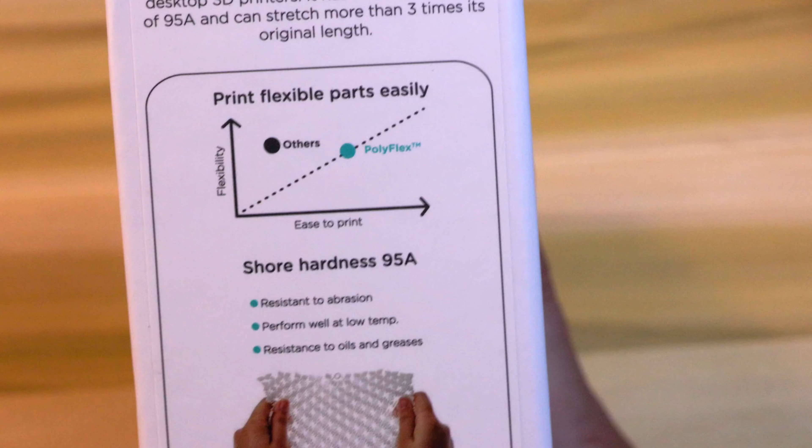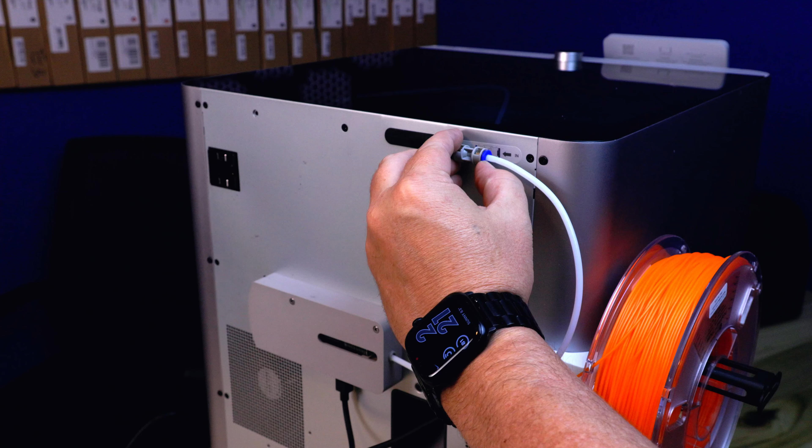So let's go ahead and get it loaded. So the first thing that we'll need to do is remove this, and all you need to do is squeeze on that little blue piece and then pull the tube out just like so.

We'll move that out of the way. Then you're going to take your TPU filament, and then we're going to feed it all the way until it reaches the hot end. So let's go ahead and do that. And this is a little finicky because it's not as solid as other filaments, so you really have to kind of line it up in that hole right there. But as you can see, it's pretty easy from there.

And I can actually see it in the tube through the glass and everything. All right, so it is in there as far as I can push it. So now let's go to the front screen.

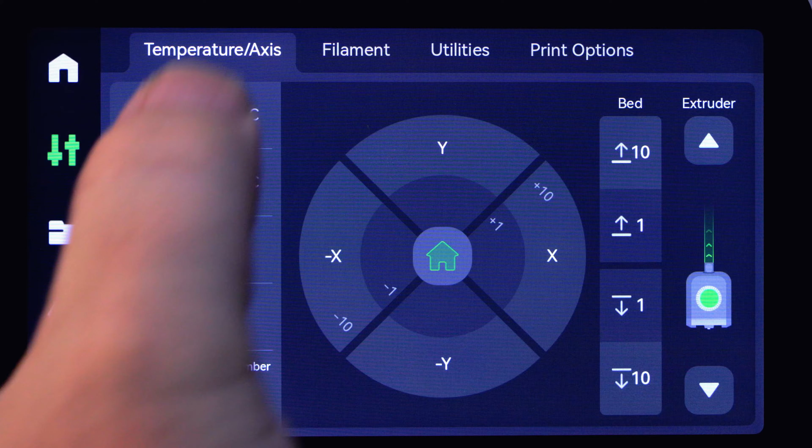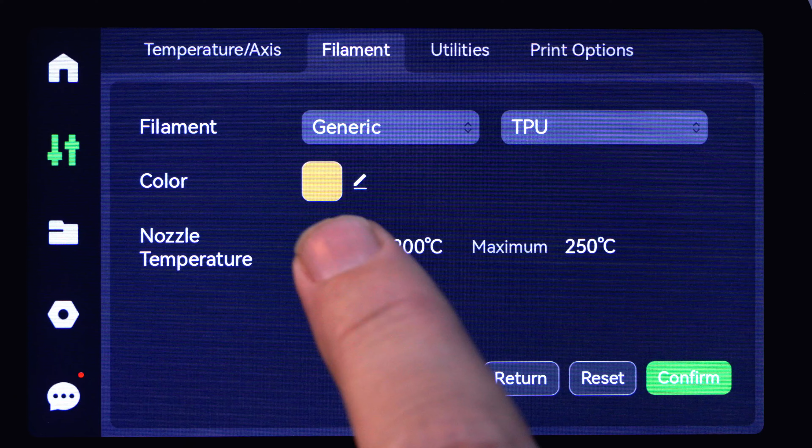All right, so now let's load the filament. So we'll want to go to our settings tab and over to our filament tab. And since I unplugged the AMS, it's in this mode now with the spool on the side, as you can see. I've already changed this to generic TPU, and I changed the color, and then I hit confirm, and now we'll need to load it.

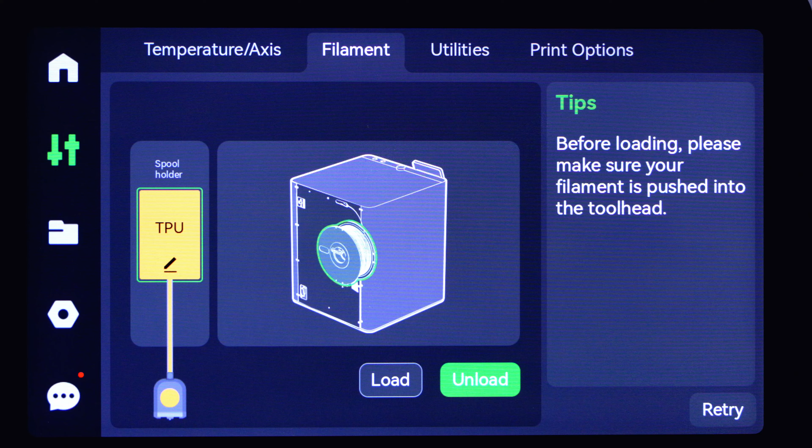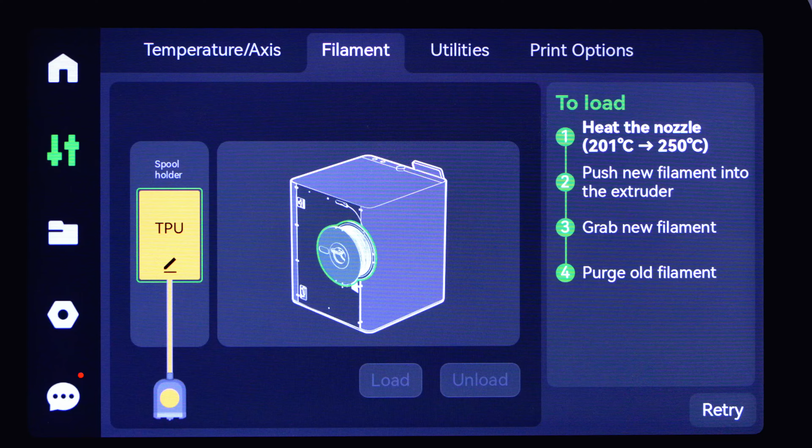All right, and all we're going to do is load this, and it's going to squirt some through, and we'll need to look in there to make sure that it has purged it out. So we'll go ahead and do that. And I'll fast forward through this part. And now our filament is loaded.

All right, so here we are in Orca Slicer. So you'll see that it's still showing my AMS, and if I hit the sync button, it says no AMS filaments. But if I go over to the device page, you'll see that the TPU is loaded. I believe what we need to do here is just concentrate on the first filament right here, and this will be the one that it'll print from.

So the first thing that we want to do is go ahead and select the generic TPU, and we're going to go ahead and let it print at this, generic, just whatever the default settings are here. So we'll go ahead and print a Benchy, and then we'll go ahead and start calibrating, and then we'll print a Benchy after that. So let me go ahead and get a Benchy loaded up, and we'll go ahead and do that.

All right, so I got the Benchy loaded in here, but we'll see it's showing up as black. I forgot to change the color, but let's go ahead and just save our profile. We won't change any of the settings other than the color. But let's go ahead and change this to orange, hit OK, and then we'll hit the save button here.

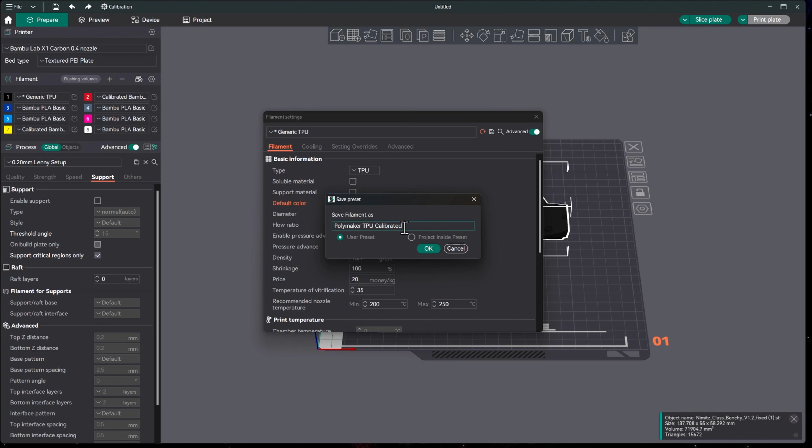And what we'll call this is Polymaker TPU calibrated. Even though we don't have it calibrated just yet, we'll go ahead and make this the name. Okay, so go ahead and exit out of there.

Not sure why it didn't change the color, but we can change that color there. So now it's showing up orange.

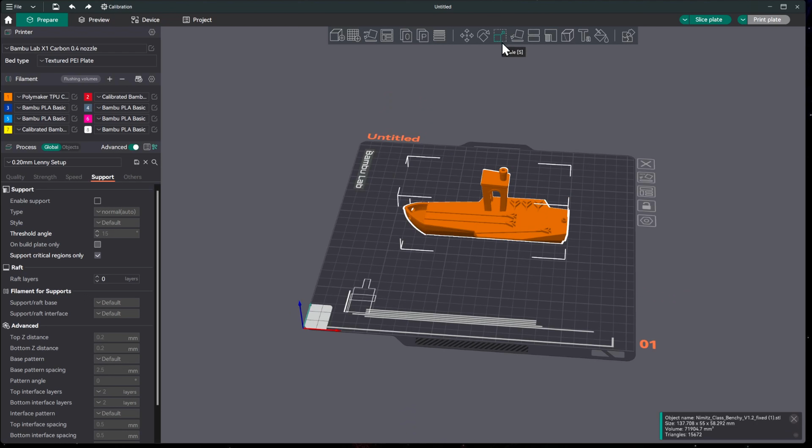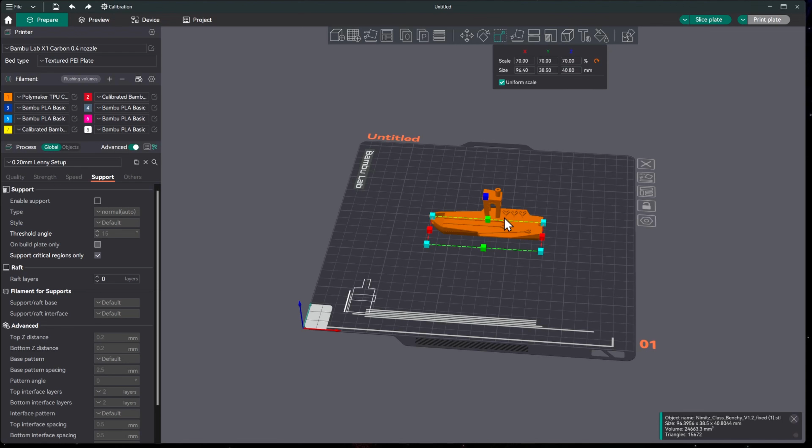Instead of printing this giant Benchy and taking quite a long time, we'll scale this down. Some of you have asked how to scale things - it's just this little button up here. As long as you keep uniform scale, no matter which of these three you change, it changes uniformly - same with size, it changes proportionally. Let's do this at 70%, and as you can see, 70, 70, 70, with the size proportional to that. Let's print it a bit smaller so we're not using up so much filament and it doesn't take so much time.

So we'll go ahead and slice the plate, and it looks like it's going to take just over an hour to print the Benchy. We'll go ahead and print the plate, hit flow calibration, and hit send, and I'll see you when it gets done.

All right, so let's take a look at the Benchy and see how it turned out.

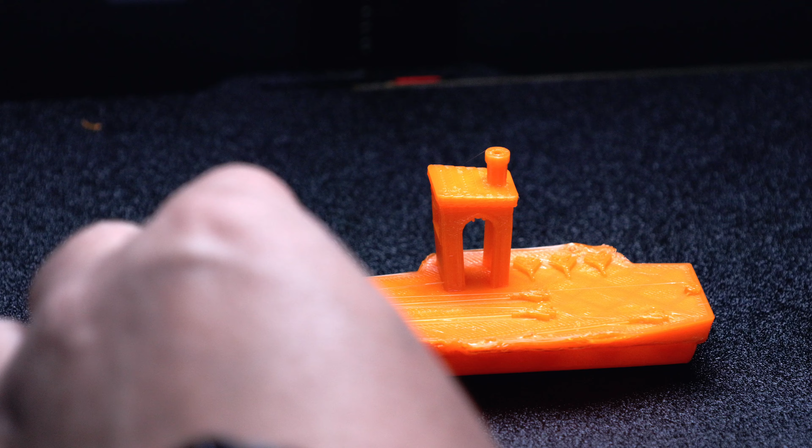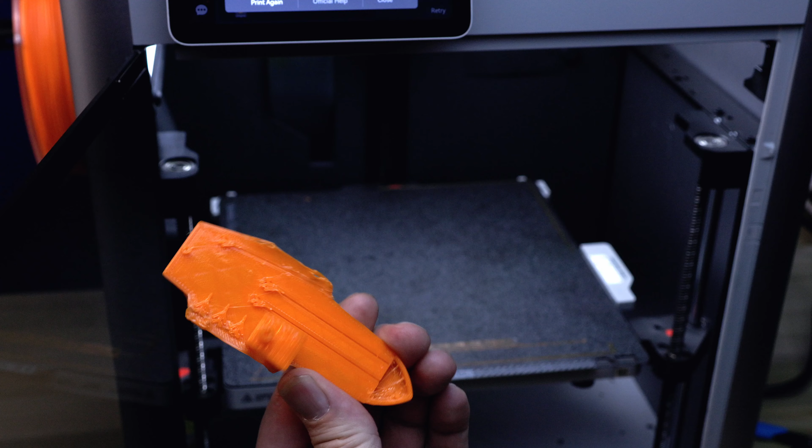As you can see, lots of errors on here. I don't know if this Benchy is the right thing to print with TPU, but we're going to give it a shot. We'll calibrate everything and see if we can get any of that out. But it is kind of cool that it's a flexible Benchy - this should be fun.

Now that we've done the Benchy, let's get started on calibration. The first thing I like to do is hit new project - don't want to change anything there, make sure everything's still here. We'll go in and enable pressure advance, then hit save.

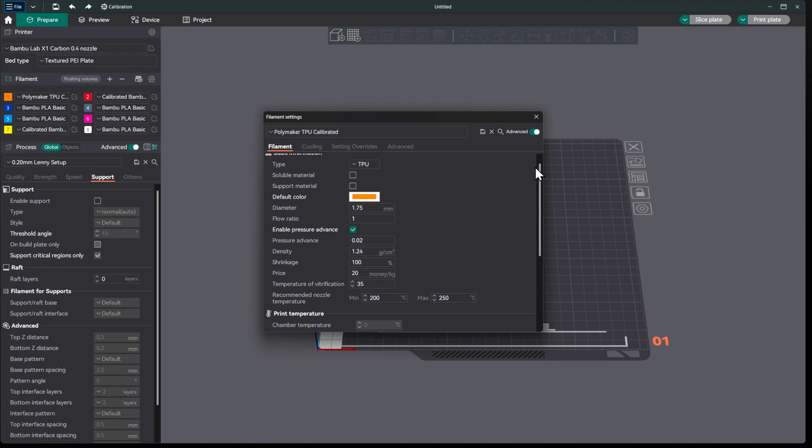Back out of that. The first thing we're going to do is the first pass of the flow rate test, and on this one it's an hour and 11 minutes. If we remember from the other one, we shouldn't really expect to see anything past the -5 and 5, like the 20, the 15 - maybe the 10 we would need.

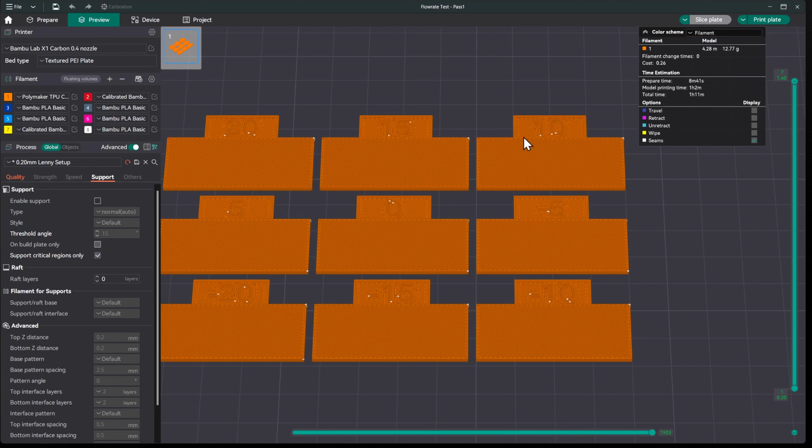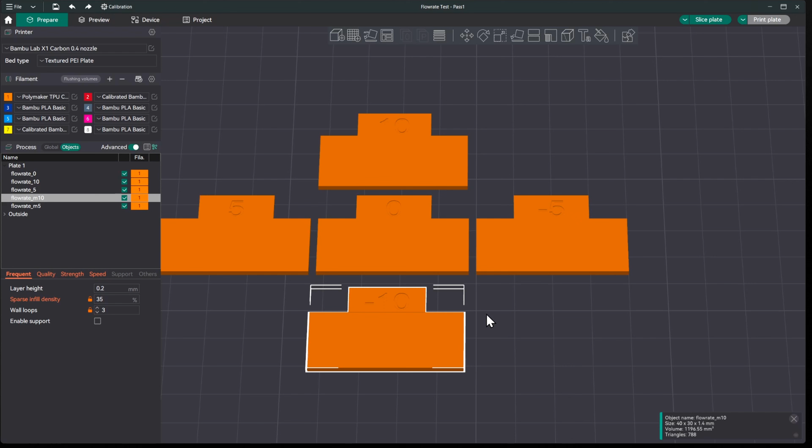So let's go back and prepare, and we can actually take that stuff out. All I did is click on the 20, and hit delete. I can click on the 15, hit delete, -15, -20. So really the only ones we need are up to 10, and the only reason I'm doing 10 on this one is because it had some pretty bad errors, so maybe it's off by a lot. Let's go ahead and do that.

That saved us a good 15, 20 minutes. I'll go ahead and print this out, and I'll see you when it gets done - no flow calibration when we print.

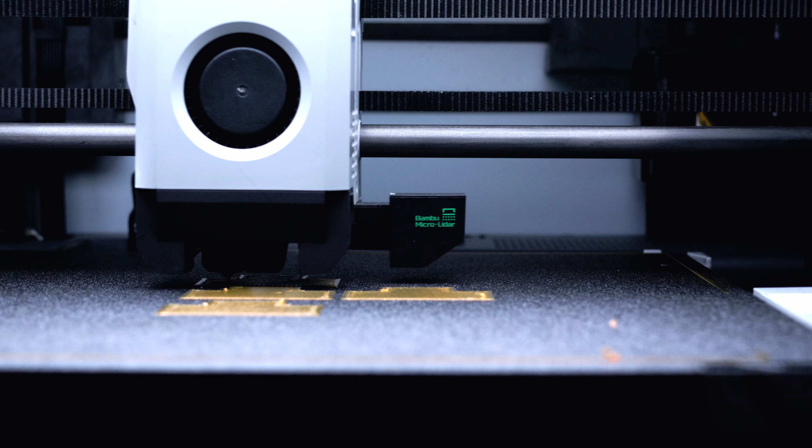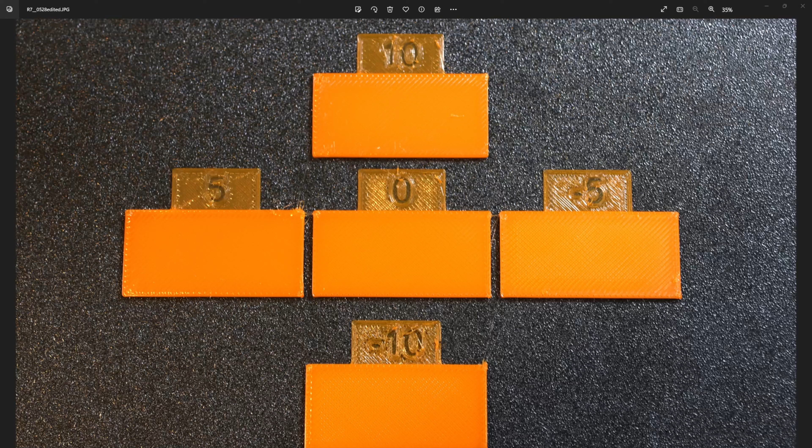All right, so let's take our picture test. Somebody had mentioned to put the light to the side and let it kind of rake across, and I think that did help somewhat with these. But like I said before, the 10 and -10 are really, really off.

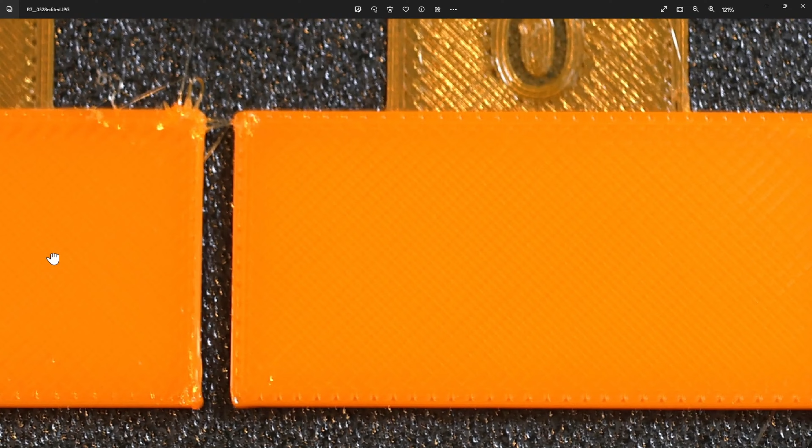If we look at this center one, this is 0, -5, +5. I would say the 5 looks better. If you remember, the next test we're going to do is just going to be in a range of 5 - it's not going to be in a range of 20 to -20 like this one was. So always err to the upper number so the next test will fine tune it back down. So between these two, the 5 looks like the smoothest.

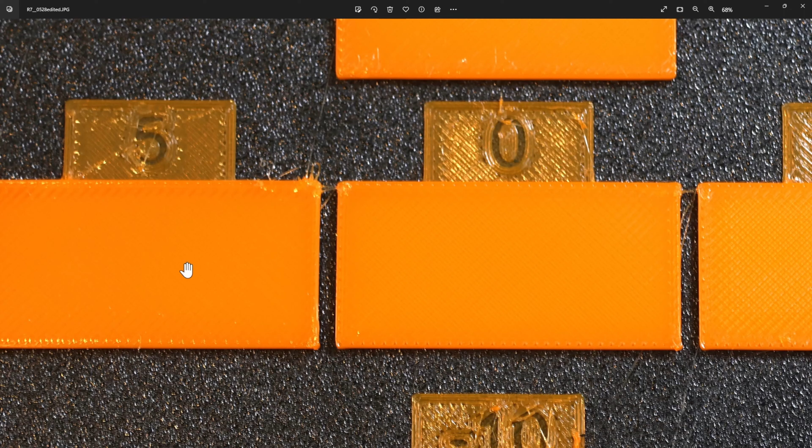So let's go to the wiki and run 5 through the little formula. Here's the guide for the flow rate, and we just need to go to this formula. Lucky thing here is 5 is the one that's in here, so we really don't need to do the math, but this is the formula you need to use, where this +5 is the modifier, or what you thought was the smoothest one. We'll use the old flow ratio of 0.98, which I believe is the one that's in here. We'll take a look in a minute, but we should be at 1.029.

So let's go to Orca Slicer and make sure that our old flow rate was 0.98, and we'll go ahead and update our filament. All right, so here we are back in Orca Slicer.

So let's go into here and see what our old flow ratio was. Our old flow ratio in the TPU is actually at 1, so we do need to do the math again. Basically 1 times whatever this is going to be - 105 times 1 is 105, divided by 100 is 1.05.

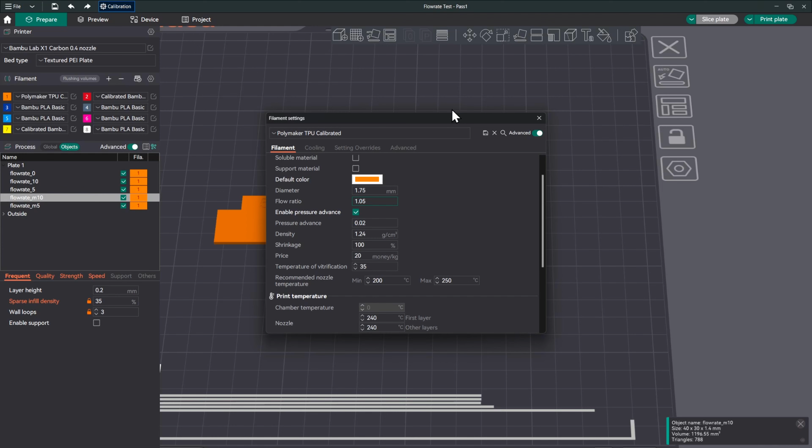So that's what we'll put in, and we'll run the second test. 1.05, and we'll go ahead and save that. We'll back out of there and delete everything off of here. Actually, I always like to do a new project in between these, and not do the calibration and then go try to print something. Always do new project afterwards.

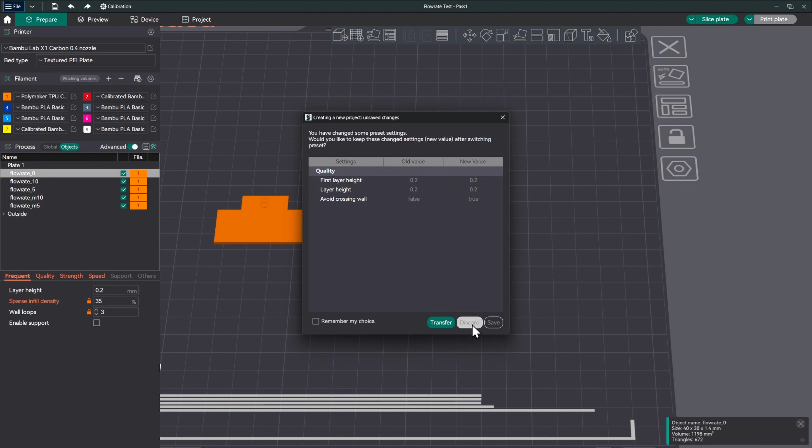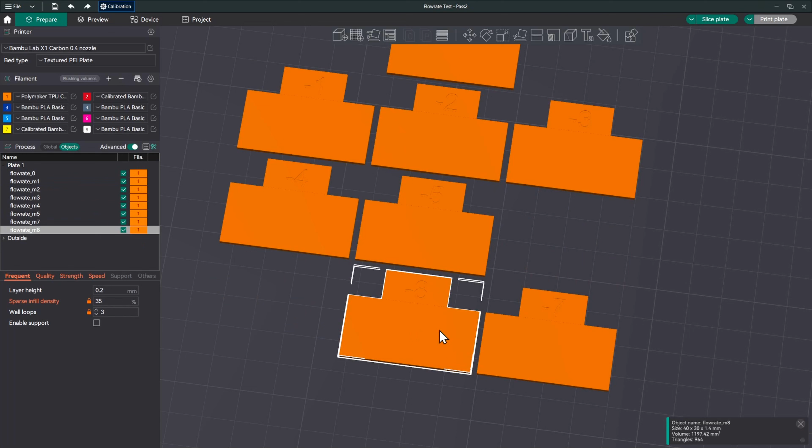All right, so now let's go back to calibration and let's run the second pass. Same thing on this one - I'm not expecting it to be more than 5 out. So we'll go to 6 and delete 9, 8, and 7. I don't think we'll need to do more than these 5 right here. We'll go ahead and slice that, and it looks like it's going to take about 45 minutes. So we'll go ahead and print the plate. No flow calibration, and we don't need to do time lapse either. I'll see you when this gets done.

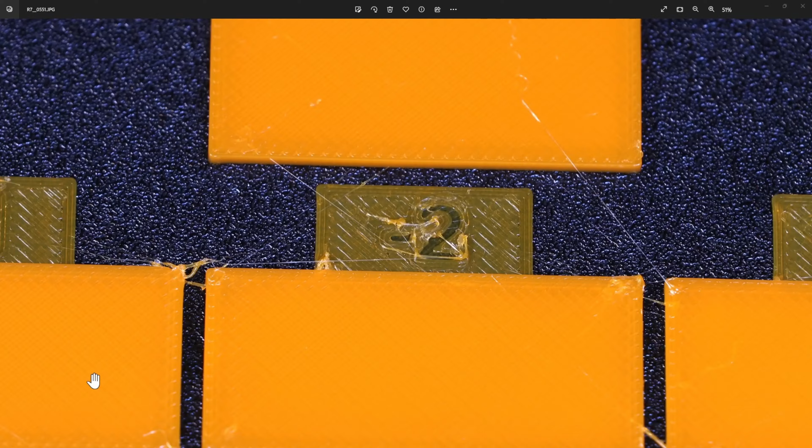All right, so we're done printing it here, and we took a picture again. The 4 and the 5 are kind of fuzzy here, they're not relevant. Really, I think it's between this 2 and the 0 when you look into them pretty close. That one seems to be rougher than this one, and then same thing on this one here. So I really think the -2 looks better.

So we'll plug that into the formula and then update the settings in the slicer. Our new modifier is -2, so 100 minus 2 is 98. 98 times our old flow rate, which was 1.05, equals divided by 100 equals 1.029. Wow, how cool is that? So that's the number that we'll update in the slicer.

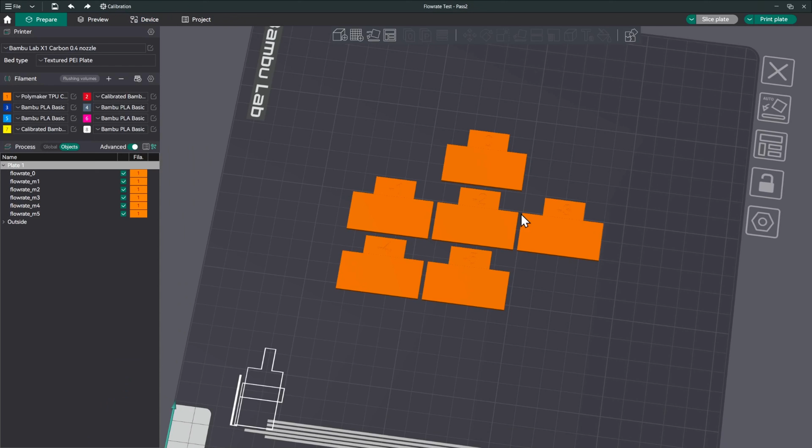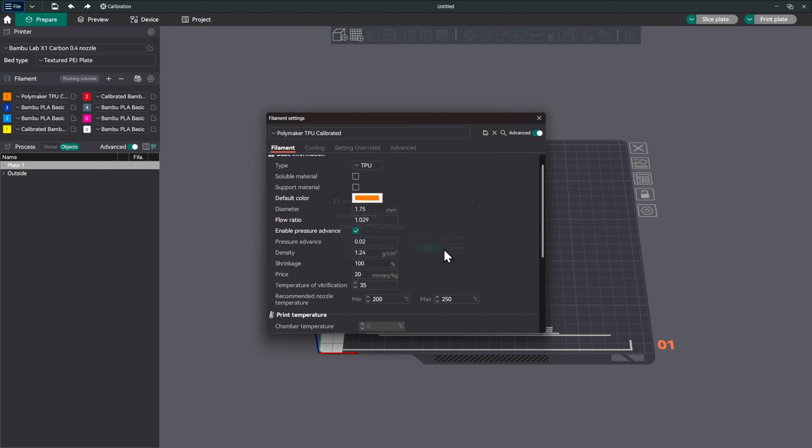All right, so here we are in the slicer. Once again, we'll hit new project, discard everything. Then we'll go into here, and 1.029 was what we came up with. So once that's done, we'll just go ahead and hit save, hit O. We want to make sure and hit OK. And then on to the next test.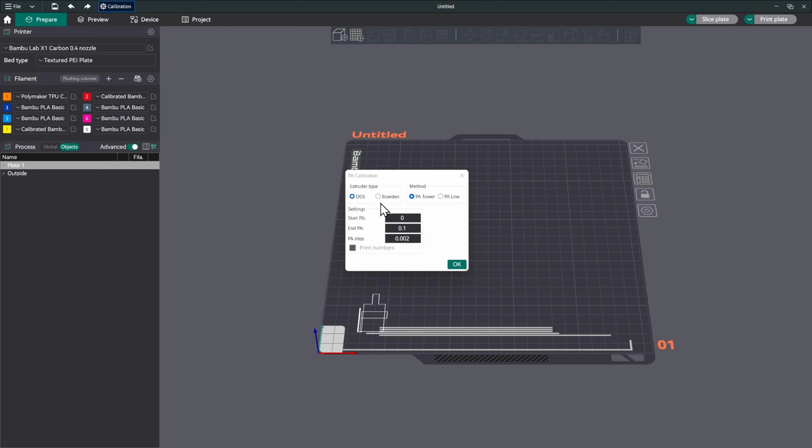So the next calibration test that we will do will be the pressure advance. We're going to do the tower method. We'll want to make sure it's direct drive, and we want to do the tower, and we'll go ahead and hit OK. That's going to put this up there, and we'll go ahead and slice it, and I'll see you when it gets done printing.

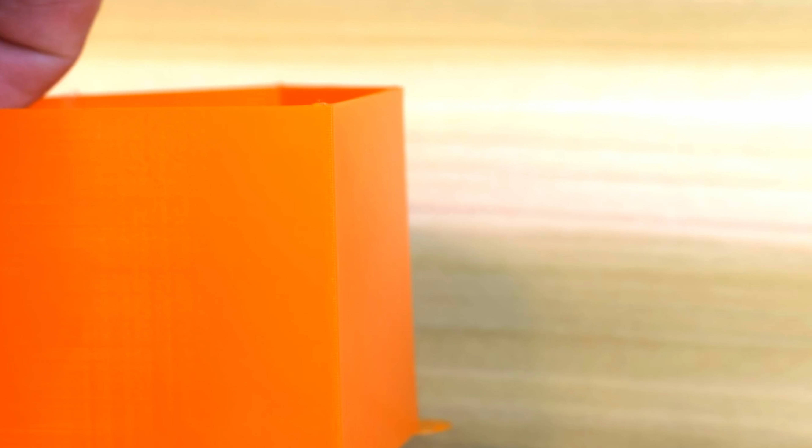All right, so for the pressure advance test, you're supposed to print this out and then measure how many millimeters it is until it starts to look bad like it is here, which I say is at 8 millimeters. So they needed to change the pressure advance to 0.016. For mine, you can't really see in the picture here, but it's perfect all the way up and down. So I'm going to leave it at its default, and the default for the pressure advance was 0.02. So we'll leave that alone and move on to the next test.

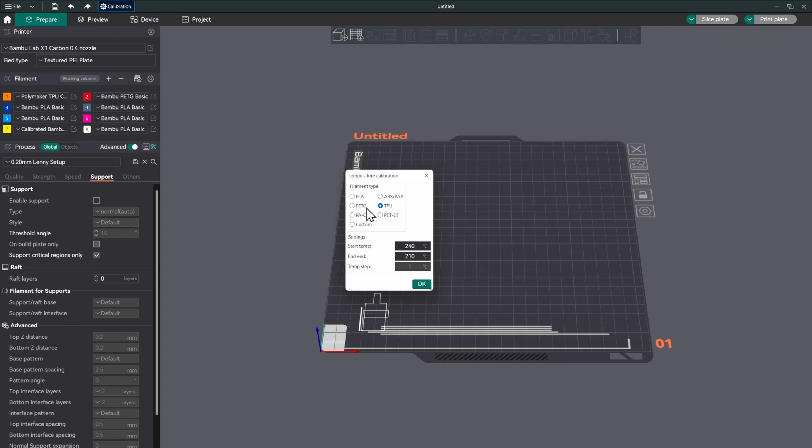The next test is going to be the temperature test. I did notice a lot of stringing and everything on the flow rate test, and part of that problem could be heat, it could be retraction as well. But we'll go ahead and do a temperature test on it. If you just select the type of filament that you're doing, it does match what is on the box for the polymaker as well. Not that it knows the polymaker, but it does know what the range is for TPU. So we'll go ahead and set up this test, and we'll go ahead and get it printed.

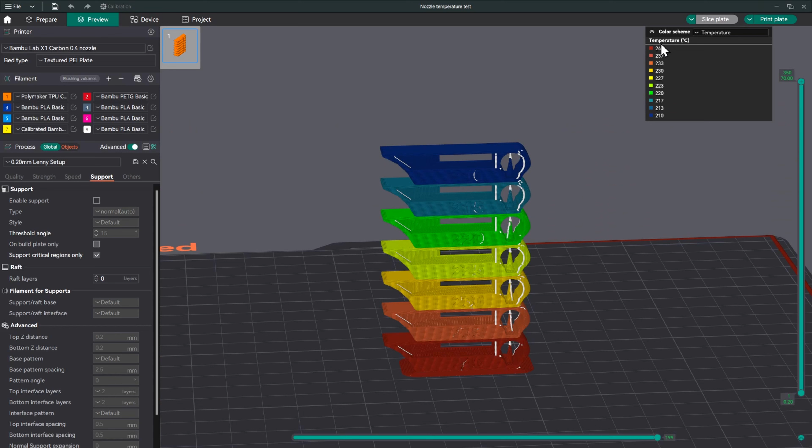So let's slice it, and I'll show you some cool stuff in here that you can do. In this test, it's going to be changing the temperature throughout the print. As you can see here, the different colors represent the different temperatures that will be printed here, so you can get an idea of what that looks like. So we'll go back to here, and we'll go ahead and print the plate, and I'll see you when it gets done.

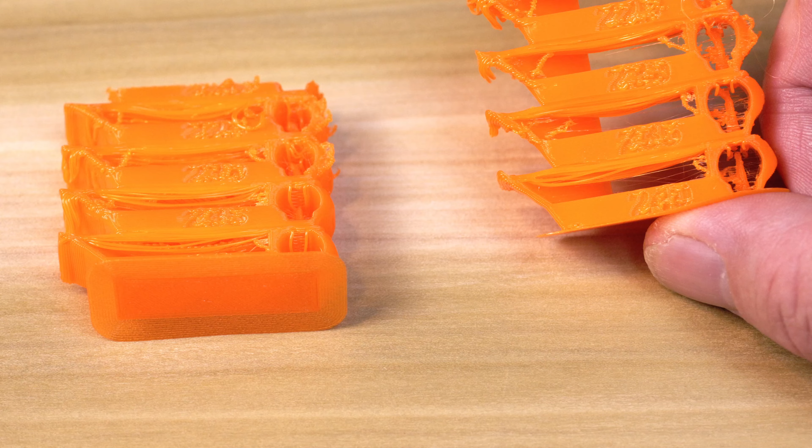All right, so I tried running the temperature test with no result, or with not a great result. I don't know if I can do anything with that. But both times it did that, and it failed pretty much in the same spot. It's like it's not pushing out filament anymore when it gets to these temperatures up here.

So we won't change anything on that. We'll skip that and move on to the retraction test.

Let's go back to the instructions for the retraction test, and this is the important part. The default values are 0 millimeters for the start retraction length, 2 millimeters for the end retraction length, and 0.1 millimeter for each step. So at the very bottom that's 0 millimeters, and it goes 0.1, 0.2, 0.3, 0.4, all the way up to the top until it gets to 2 millimeters.

Let's take a look at the result. As you can see here at the very bottom, everything looks good, and then as it goes up, it starts to really string. It looks like anywhere from 0, up to maybe 0.3, 0.4, it's only a couple of steps up, and after that it comes back.

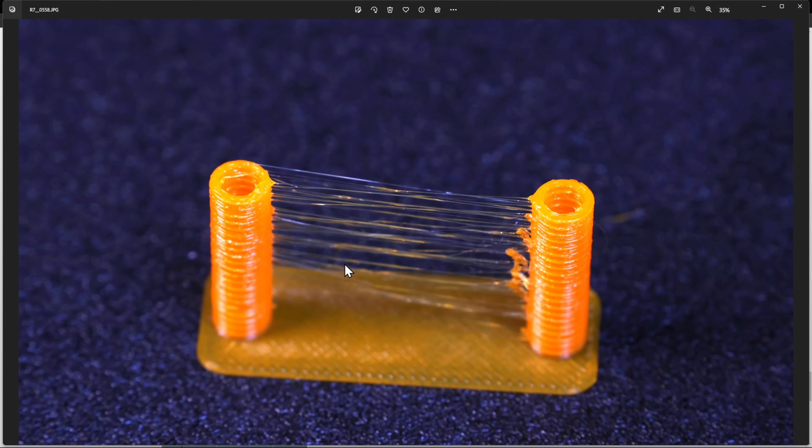So let's see what the default value is in Orca Slicer. We're going to need to open up the filament settings again and go to setting overrides, and we'll see that retraction is right here. The length is at 0.4. This looked good from 0, and as it went up it started to get worse. So let's try 0.1 on there, and we'll go ahead and hit save.

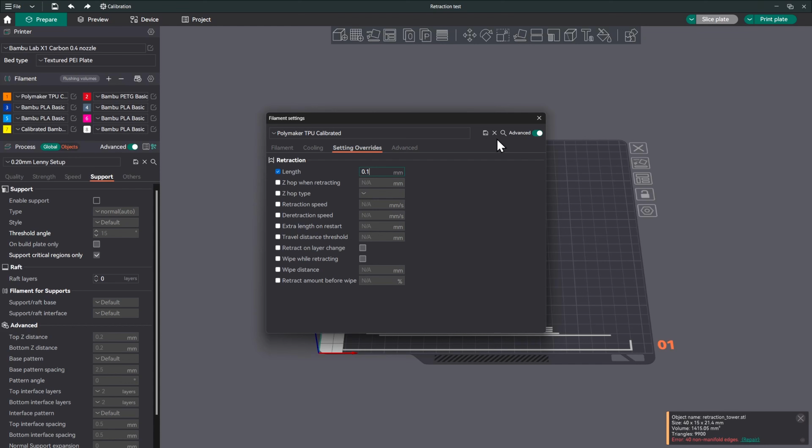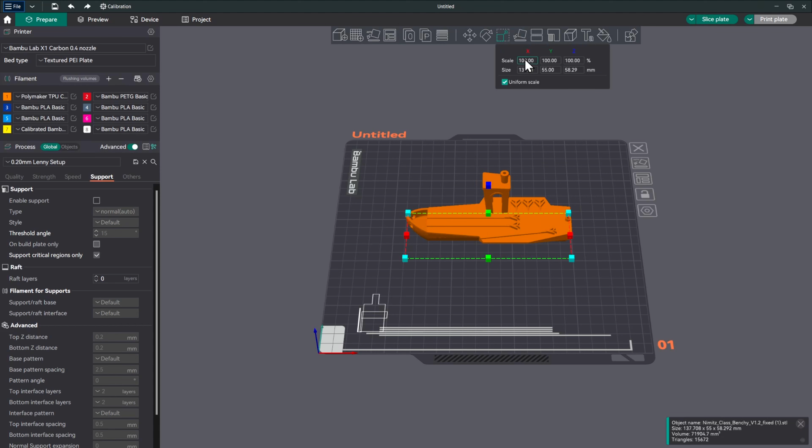Close out of that, hit new project, we don't want to save. Let's go ahead and see if we made a difference. We'll bring in our Benchy, scale it to 70, and slice it.

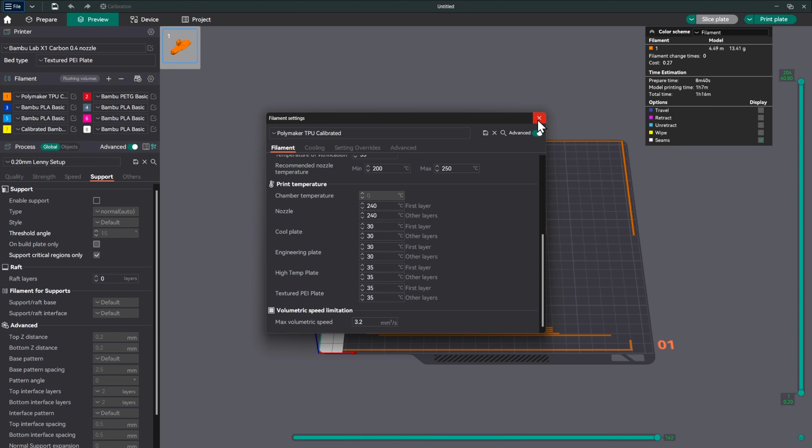We didn't do the speed test on this one just because I don't think that thing's going to do super high speed. So we'll leave the volumetric max speed alone, which you see is set fairly low here, and from everything I've looked up, it should be pretty low. I don't think we want to make it any faster. So let's see if we had any effect on the quality of the print.

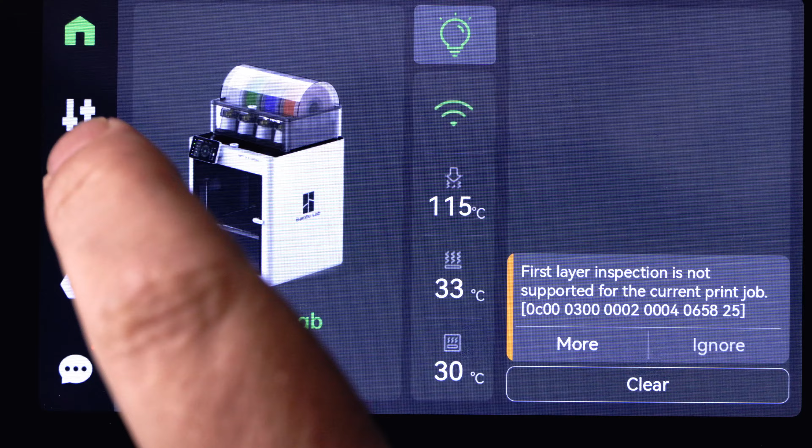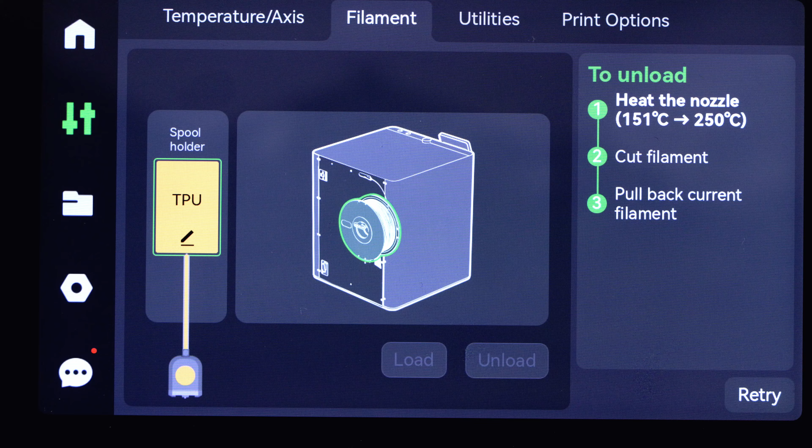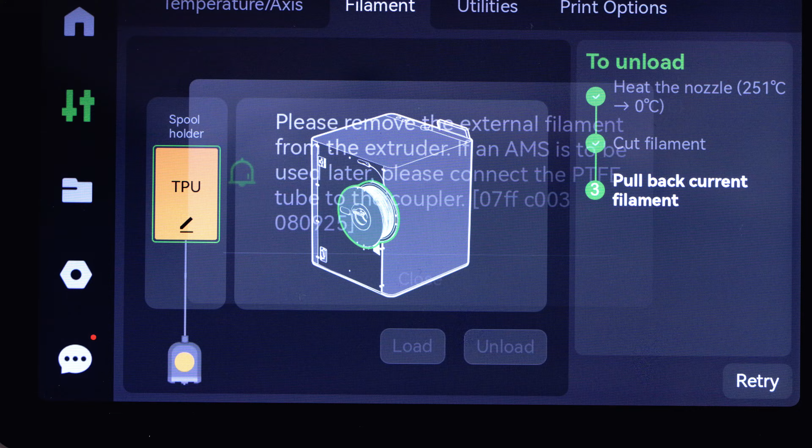Before looking at the Benchy, let's unload the filament so we can get the AMS reconnected. We're going to close out of here, go back to settings, back to filament, and click unload. It's going to heat the nozzle up, cut the filament, and then we'll manually pull it back out of the tube. All I did was pull the filament back, and we're ready to reconnect the AMS.

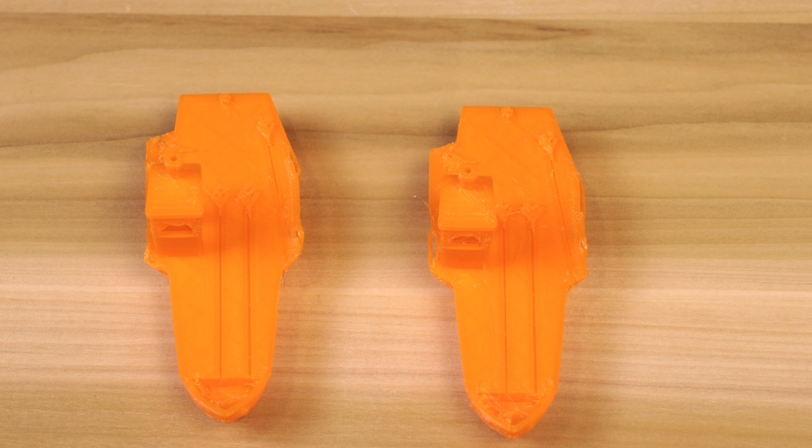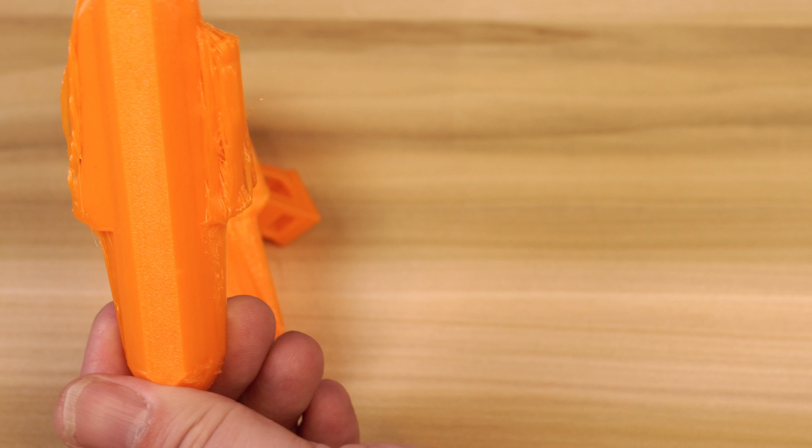Let's see if we had a result on the quality of the print. The one on the left is what we printed first, and the one on the right is what we printed after calibration. I don't know if this Benchy is the best thing to print out of TPU. It did a pretty good job on most of it, but on the overhangs it seemed to struggle. You can see it struggled quite a bit on the first one, all the way into there it really struggled. It's not perfect on here, but it did do a better job.

So we did have a result. I won't go through the whole process again on film, but I will go through it one more time because it did have a positive effect. So it's not perfect, but it is getting there.

So the answer to the question is, can you tune or calibrate the filament? It looks like you can, and I'm having some success with it. I'm not sure this is the best thing to print, but this tests gaps, overhangs, arches - it tests everything, that's why I like using this Benchy. But it did have a result, a good result.

I hope this helped everybody. If you've messed around with TPU and have any tips or tricks, please leave them in the comments below. If I did anything wrong or could do anything better, let me know. It's really the first time I've ever printed with TPU, but I did see a positive result with the calibration.